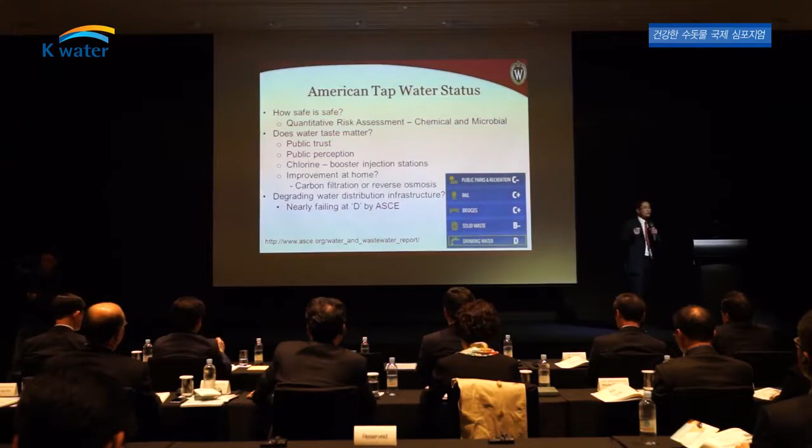And then water taste, is that real or perception? And we try to build public trust and change the perception so that tap water is seen as safe. And then we try to minimize the chlorine odor, so we actively create booster injection stations throughout the city, and we also try to educate people about carbon filters or reverse osmosis installed at home. This is a major issue in the United States right now. These filters and reverse osmosis are getting cheaper, and companies are actively promoting them. And based on American income levels, these are really not that expensive.

So people tend to install it, but then the problem is you install it and then you don't change the filter, then what happens? It becomes like a biological pathogen growing filter, and after 2 years of not changing, not maintaining filters, they call the water utility and say we have a problem, and then they send people to see what kind of problems we have, and it comes down to the maintenance problem. So we try to educate people.

You don't really have to install those water systems, the filtering system or reverse osmosis, which requires a lot of energy, and why would you do that? Regular water is as safe. Unless you really have a sensitive nose, that's not necessary. That's what we are trying to educate people about.

And then, on the other hand, we do have an infrastructure problem. As I said, New York is 100 years old. We have to replace all the pipes there. And the American Society of Civil Engineers gave a D for the grade. Here is the situation: we have to replace the pipes because they are really aging. So this is the kind of investment we should make, and that requires about $1 trillion. The American budget is annually $20 trillion, and this is $1 trillion over the next 50 years. That's the magnitude of the investment we need.

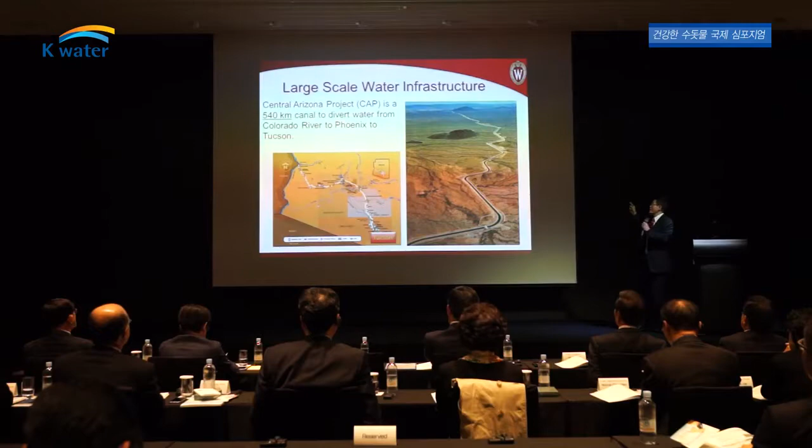This is one example. On the other hand, in the desert of Arizona, I lived in Arizona for 22 years, the water is very scarce, and the scenery looks like this. In order to gain the necessary water in the Phoenix and Tucson area, they have about 540 kilometers of canal to bring the Colorado River water all the way to Tucson, Arizona. They started planning in the 1960s, construction began in 1973, and it was completed in 1993.

What happened is that the Colorado River water, as opposed to groundwater, has a different pH. So when you change the pH, all of a sudden the pipe systems, particularly cast iron, could produce red water because of iron. Tucson Water was blamed for that, and they had to shut down the Colorado River water completely, recharge it to ground, and come up with a new system of extracting water, and they spent a decade to do so.

They also came up with a proactive, transparent public policy, reported water quality to consumers proactively, and installed smart water sensors at 22 different remote locations and collected the data remotely, and that was funded by EPA. So yet again, instead of blaming anyone, EPA came and helped the local district. Okay, we understand the problem, we can help you, how can we help you? So they funded it from the federal government: this is how we monitor, and let's make a sample case.

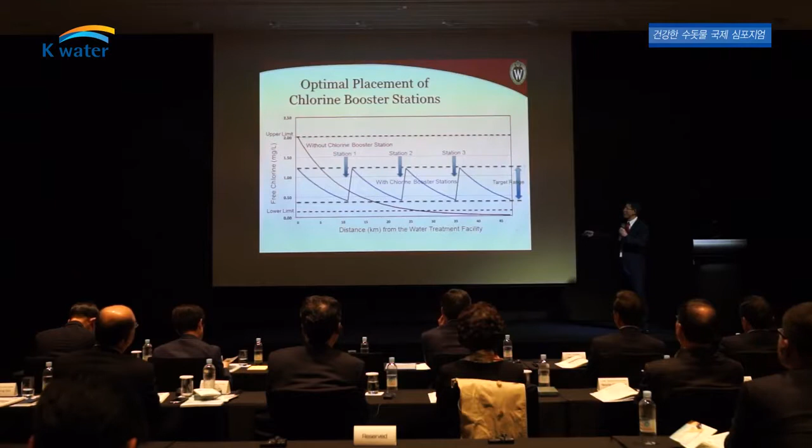One of the big agendas I was involved with at Tucson Water when I was at the University of Arizona was chlorine booster stations. If you introduce high chlorine, people tend to smell it, particularly those who are sensitive, and if you are under 0.4, we are risking people with microbial contaminants. Pathogens can grow under this condition. So we tried to introduce booster stations intermittently to introduce chlorine so it stays within the range. Normal people wouldn't detect it, and we are not risking microbial contamination, so we developed this system over 10 or 20 kilometers. This is an important way to ensure that people drink water and it tastes better.

But the problem associated with it is that the water pipe is not linear, it is quite a networked, complicated system. Therefore, you need network theories, optimization and highly mathematical theoretical development behind it, so they invited university researchers to come up with an optimization scheme for where to install water booster stations. So this is one good way to invite people. And later, US EPA and Homeland Security came to develop a water security system in this city.

So to see the overall approach in Tucson, they hired water quality experts and listened to consumers over 25 years. Just simply listen to them and troubleshoot each case. And then 22 sensor stations and manual surveillance as well. And real-time water quality information through the internet when the internet was first introduced into the city.

And then house visits, premise plumbing, water quality assurance programs. They executed over 25 years, and therefore they built consumer trust over 25 years. That is a good example of how much effort it requires to educate people. Now if you go to Tucson, a lot of people drink tap water without any hesitation.

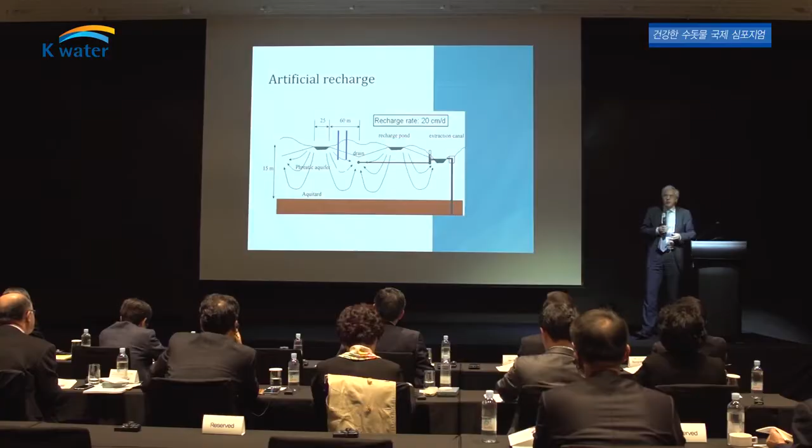So the extraction canal is on the right-hand side, the recharge pond is in the middle, and then the water flows through the underground, and the quality of the water will then essentially be improved. Also the buffering capacity is an asset, and also the ability to smooth, to decrease the variation in water quality which is present in the surface water. Talk about temperature, talk about variations in some other parameters. They are all smoothed off during the infiltration.

This is a very nice dune area, a little bit west of the city of Amsterdam. And this is an area where the water supply company is responsible for the nature. And they are doing that by having these infiltration canals, all well in place, all well secured. It's a very nice natural area where you can see the deer walking around. It's very nice to walk around as a person there. And this area is well maintained because of its function as an area where we are infiltrating future drinking water.

We have a softening stage, which focuses on achieving a level of softness of the water of 1.5 millimole per liter. And then a biological activated carbon filtration with a high residence time in the order of 40 to 50 minutes in order to pick out the organic matter, degrade the organic matter which has been oxidized in the step prior to the activated carbon.

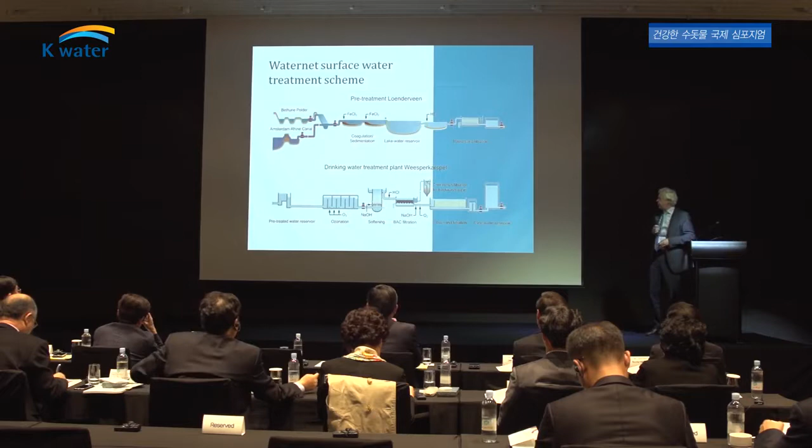Then focusing on the distribution, because you've made a perfect quality drinking water, but in the distribution system a lot can go wrong if it is not well designed. So the residence time in the distribution system should be limited. That's the reason why the distribution system is designed to create a certain maximum residence time. And we are focusing on pipe materials which are not so prone to biofilm formation.

So biofilm formation is one of the issues which we are taking into consideration when we are designing the system. And as I said, we are trying to create a biostable water which does not tend to create any biofilms in the distribution system. So the focus is on AOC levels less than 10 micrograms per liter. We have a variety of materials in the distribution system, and some of them, like for instance polyethylene, are quite prone to biofilm formation, so we tend not to use that anymore in future upgrades.

The operating organization, I will not go into the details of that. Personnel development, I'll forget that, you can see that in the readings. The organizational structure, I think, is also important. If you look at the countries in Europe, there are various organizational structures in the public water supply.

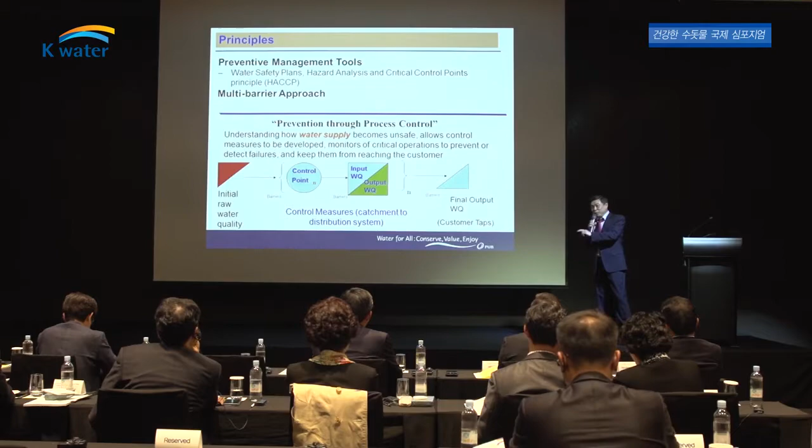So the preventive measure is through process control. When we say preventive, how do we prevent? Preventive here means you go through the process. The principle is that if you make sure every step in the process is correctly performed, chances are the endpoint water product will meet the specification. So basically it's quite a simple principle.

In our water quality management, essentially there are 5 parts. The most important part is to have a water safety plan. I'll go through the other parts in detail. You notice that R&D also plays a part in water quality management. The others are monitoring, auditing, and intelligence. You need to have a system to manage it all.

You have a lot of water quality data. Then how do you make use of the data? You need a system. And then water quality security in case of contamination: how to capture contamination, how to get an early signal of contamination, and how to respond to every case of contamination. So I'll first talk about the water safety plan.

Just now I talked about how endpoint testing is too late and too little. Too little in the sense that when you test all the parameters, you are testing based on the WHO standard, maybe 102, or US EPA, 100 something. So you are talking about 100 parameters. But in principle, we know there are many things beyond these 100 parameters. The reason we don't test them is because we don't expect them to be there.

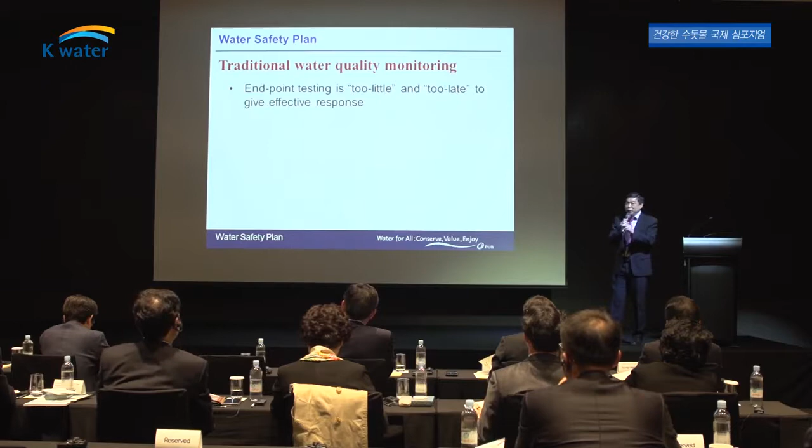But if you make sure your treatment process is done properly, chances are all these are not there. Too little also from the microbial perspective: in the WHO standard, there's only one microbial parameter, E. coli. But we know there are many other pathogens in water, and we are not testing for them. So the important point is to make sure your process is right.

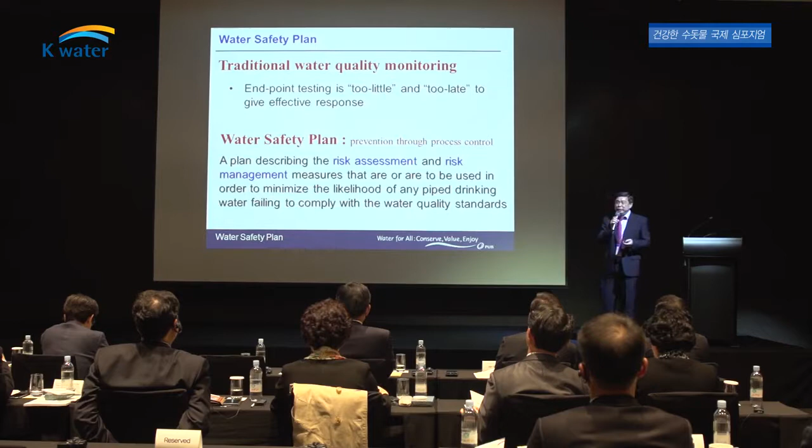So how does that relate to the water safety plan? It is actually prevention, still prevention through process control. So you do risk assessment and you manage your risk. Everything comes with a risk. So how big? I will go in detail into the framework of the water safety plan in Singapore. We have a regulator. This is to regulate PUB in terms of water quality. And the regulation is based on health-based targets, all the standards and parameters.

Then within PUB, this part is what PUB does. We have come up with a water safety plan. The regulator wants PUB to have a water safety plan. So in the water safety plan, first you set up a water safety team. The team consists of all the experts. You have chemists, you have microbiologists, you have E&M engineers to look at the pumps, all these come in. And this team does a system assessment.

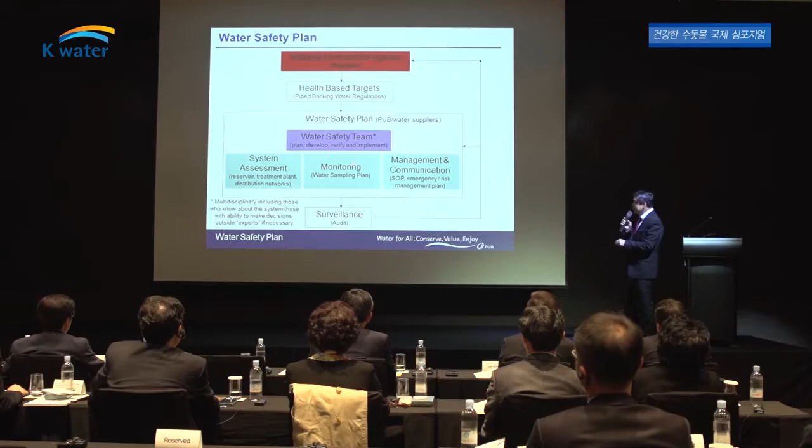You look at where the points are where a possible hazard can come into the whole process. With that, they set up the critical points and do monitoring. Then if there's something wrong, how to manage them, how to communicate with the residents, with the population about that. So this is within PUB. Then on top of that, you need surveillance and audit, because it's no use internally thinking that you are doing good; you need an assessment from outside to look at whether you are doing good or not.

Actually, this is taken from WHO, so we base very closely on the WHO approach in the water safety assessment. This is another chart that I'll go through real quick; I briefly talked about it. When we talk about the water system, you include the reservoir, water treatment plant, and water distribution system. So water safety is not only treatment. It involves your source, your reservoir, as well as your distribution.

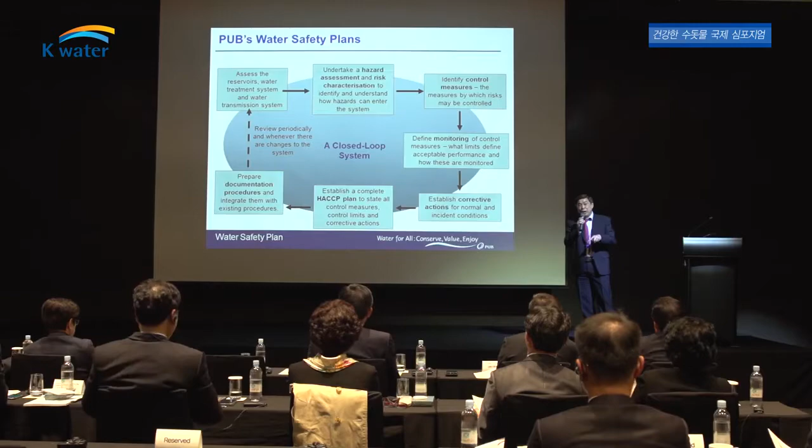So you do hazard assessment, you find out how to control, then how to monitor, then how to take corrective action. You establish a complete plan. HACCP is hazard analysis and critical control point. Basically, you know where it can go wrong and how to control it. You prepare documentation and you review this periodically. So in Singapore, our regulator wants PUB to put up or review the water safety plan every year, or when you change your system, you have to put up a water safety plan.

So to put it in short, in the whole holistic approach of water management, first you have to start with the reservoir, the source water. Where can the source water quality go wrong? When? Which part? How to prevent it? Where is the monitoring point? How to control them? So you start with that. Then you look at your water treatment plant, your multi-barrier. In the water treatment plant, you also establish control points, how to know that something is wrong. I'll go into that a little bit more.

Then the third part is the distribution. Then you need comprehensive water quality monitoring, because you still need to do all the water testing. So when I say endpoint testing is too late or too little, it doesn't mean that you do away with all the water testing. You still need water testing as a monitoring tool to make sure the process is correct. But it's not meant to prevent the water safety event, right?

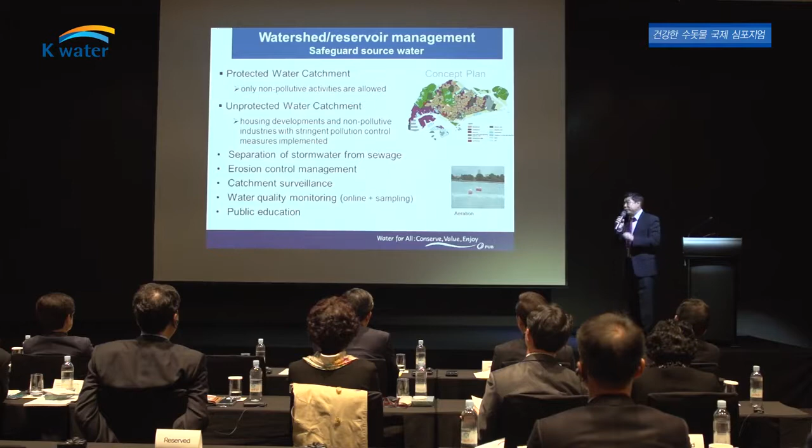So how we do it: for the watershed, we protect the water catchment. These are quite conventional ways. We do erosion control, we do catchment surveillance. We have online systems for all the reservoirs to measure conductivity, pH, algae, and some online instruments measure, for example, turbidity. So the online system monitors the reservoir, so you have a sense of how good the reservoir water is in real time.

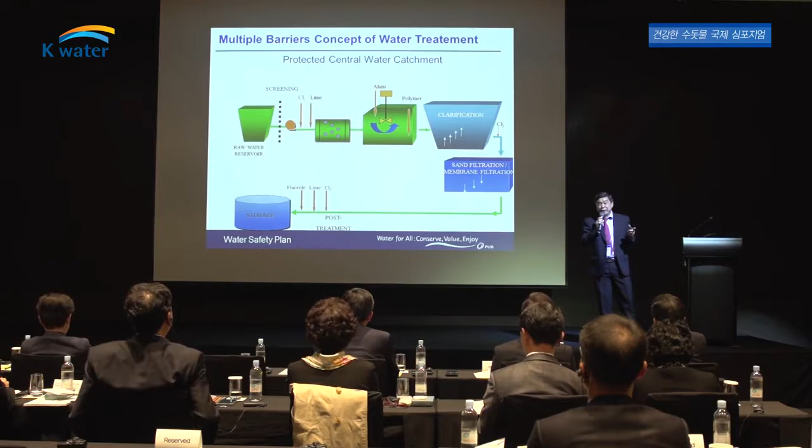In terms of water treatment, we have two concepts. Singapore is highly urbanized. One part of the catchment is within the jungle. We call it protected catchment. In the protected catchment, the water quality is relatively much better, so in that case your traditional water treatment process is good enough. But for water from urbanized catchment, we add in ozonation and biological activated carbon filters.

So in the waterworks, that's why I mentioned that we control the process. At each process, these are all our control points. At each process, the pH, this is what we expect it to be. At every point, at the clear water tank, all these things are measured online. So at any time, you know whether your treatment process is performing well.

Coming to distribution, I think this was covered by the earlier speaker. I think it's almost the same. You have a closed system. You don't allow people to tap into it, and you have to have your repair procedures and comprehensive water quality monitoring. You have a good code of practice, those kinds of things.

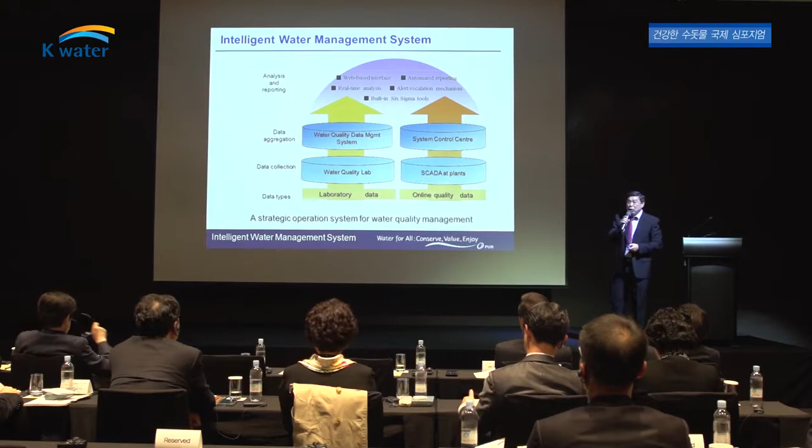I'll go real quick. You have data, these are the lab data, online quality data, collection, and finally you do analysis and reporting. It can be a real-time analysis. And sometimes the online data can trigger water quality events. These water quality events, I'll quickly go through.

If you see that you have an event, how do you know it's an event? Because you have certain control points, and your online data triggers that there is an event. You activate your plan, and then the lab emergency response plan will kick in.

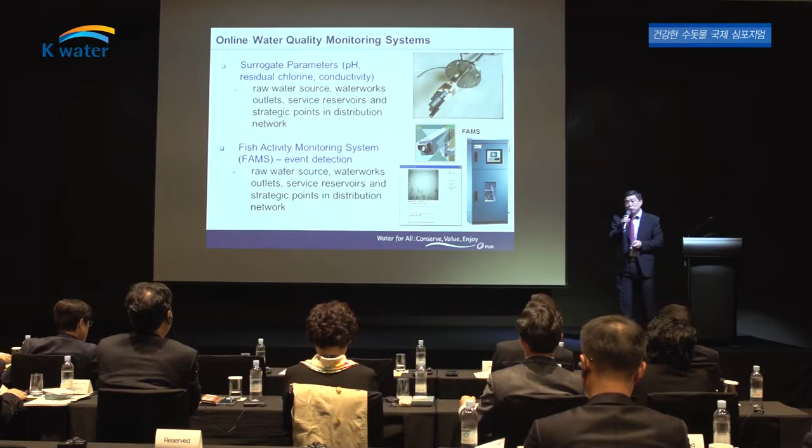So in short, how do we detect water quality online? What do we do monitoring water quality online? These are what we call surrogate parameters. I think all of you know about this. And then we have biological toxicity also put online. We use fish to detect abnormality in water quality.

So the lab response, I'll put it as 3 tiers. The first tier, you straight away scan within about half an hour. You look for toxic matter. And then within about 4 hours, you do all the tests, your GCMS test, your IC, you screen through all the heavy metals. Within 4 hours, more or less, you have a screening result of whether it is chemical contamination or microbial contamination.

Of course, to identify what the contaminants are, you need about 24 to 48 hours. Some of the microbial contaminants you need to culture many times to see their growth.

So monitoring and auditing, we have this water quality monitoring. The blue ones are online, all the online sensors. Red ones are manual. So there is online monitoring as well as grab samples. Grab samples are to make sure that the online is working fine.

You know Singapore has NEWater, and part of the NEWater is discharged into reservoirs. So the NEWater process is monitored online. And then from the reservoir into the treatment works, the raw water, we have online sensors and grab samples, and all the way through the process, we have online and grab samples.

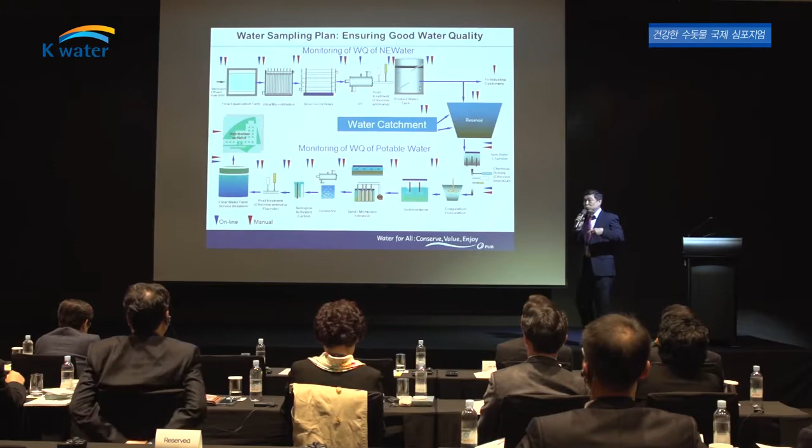In distribution, we have grab samples, but we have already installed 25 sensors in the city area, and this has been going on for about 3 years. It's under testing. The testing shows that the result is promising, and we are going to roll out about 300 sensors in total in the network.

So in terms of strategy, this is our monitoring frequency. I won't go into detail. What we monitor for, we look at WHO, we also look at US EPA. And Singapore itself, the regulator has their standards.

And on top of that, we have our internal operational control. These operational controls are set points that we set to make sure the process is right. Of course, they are more stringent than all the standards. So if there's an alert telling you that you are going out of the operational control, the operator will have to take action to bring it back, so that you still have time before the water quality reaches the standards.

So in short, in terms of quality monitoring strategy, you have your operations parameters that you do every day. More frequently, we do daily some of the important general parameters. Some to meet the regulations, some are daily, some are annually. And comprehensive here means that we actually monitor in total 333 parameters. This will include all the emerging contaminants, the PPCPs, hormones, and pesticides, all these chemicals.

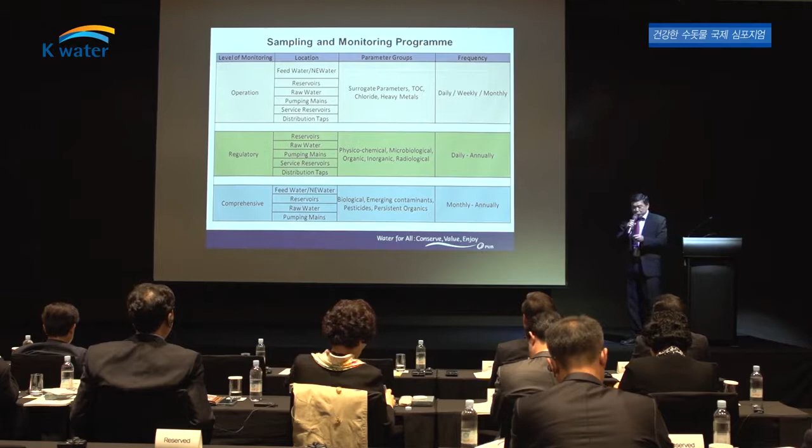You know that in Singapore we do not have agriculture, but we still monitor all these things because Singapore's catchment is quite unique by itself. 2/3 of Singapore is highly urbanized, and 2/3 of Singapore is being used as water catchment. So we want to be more preventive rather than reactive. So this shows the frequency we are monitoring at and the number of parameters that we are monitoring.

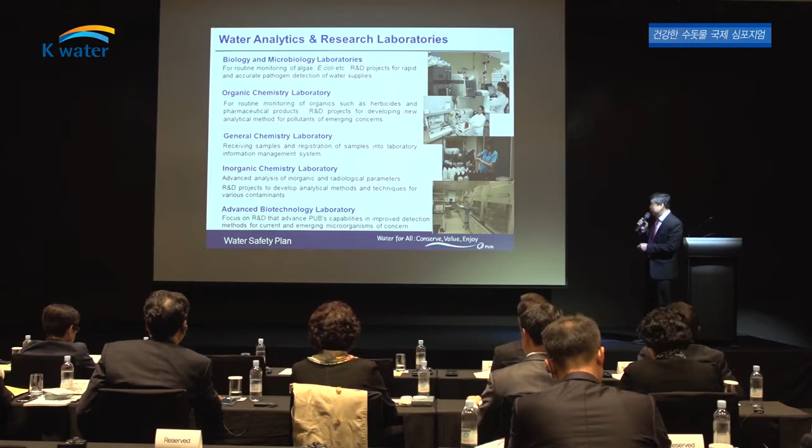So the last part of it, R&D. The lab also does a lot of R&D, for example, trying to detect the water quality. I'll show you some of the examples. These are the R&D into water quality sensors. We want to develop quick and cheap sensors. For example, Optiqua, I think is a Netherlands company, and when I spoke to Hans, we talked about this. They are developed using refractive index to detect change in water quality as a general surrogate to tell you that there is some change in water quality. We worked with them in the R&D.

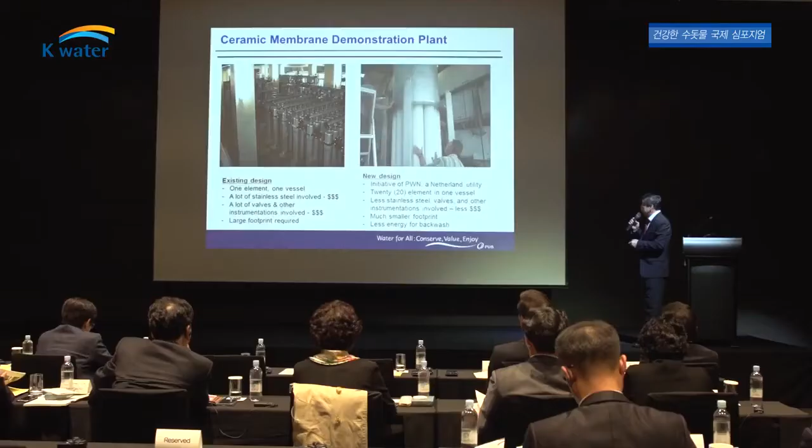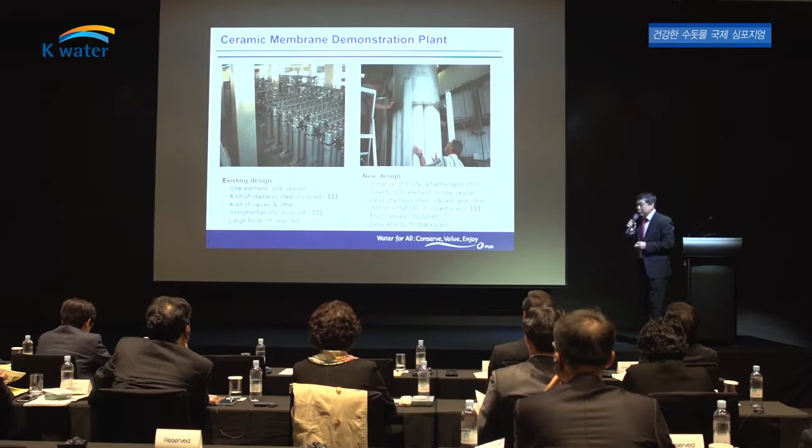This ceramic membrane, we also worked with another Holland company, PWN, to try to demonstrate the ceramic membrane as opposed to polymeric membrane.

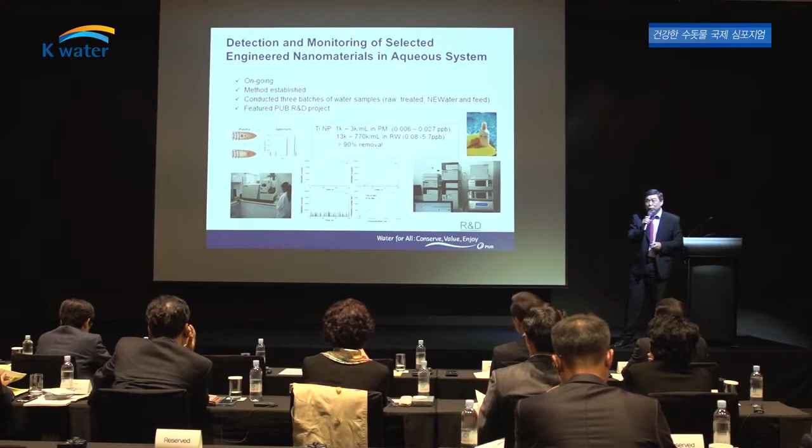This is done by our lab, trying to detect nanoparticles, because nanoparticles are the next thing. Nanotechnology is exploding, and people start thinking about what the health impact of nanoparticles will be. Before we can even go to that, we need to detect them. There's no standard protocol in the world to detect nanoparticles. Some use ICP-MS to try to detect nanoparticles. So we follow that, we are trying to also develop a protocol, and we have done a few sets of data on this. So this is also true research.